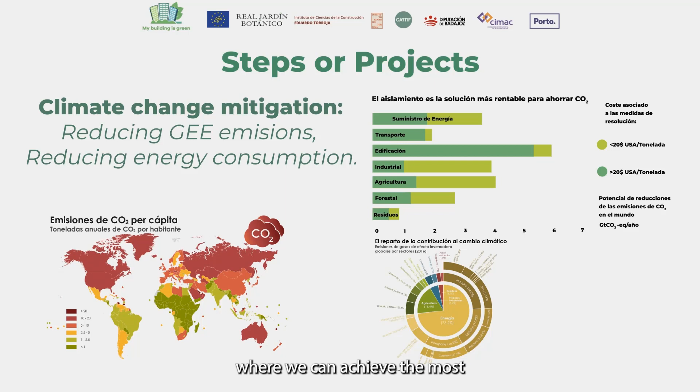What can we do about climate change? On the one hand, we must offset its effects, and on the other hand, we must adapt to the real change that already exists. How can we mitigate its effects? By reducing greenhouse gas emissions, by reducing energy consumption. Building in the Northern Hemisphere is one of the areas where we can achieve the most with the least investment.

Although we continue to work on mitigation, we must adapt to the reality of climate change, and we cannot do this by installing artificial cooling that increases greenhouse gas emissions, but through passive measures such as shading or ventilation, traditional measures of bioclimatic architecture, and in this case, through the use of nature-based solutions with the presence of biodiversity.

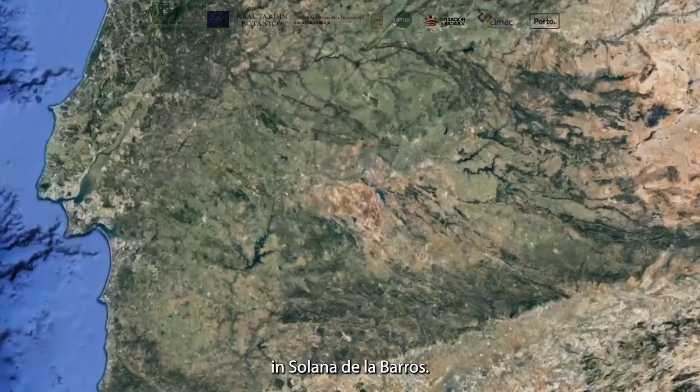In the case of the consequences of flooding, it is advisable to use sustainable drainage systems, reforestation, and the creation of protective infrastructures. In the specific case of the Gabriela Mistral School in Solana de los Barros, we have a building chosen for its ideal architectural configuration, ideal for testing and trying out the implementation of nature-based solutions.

We have a central building, the oldest of the existing ones, with a hipped roof and a new annex module built in 2006, with flat roofs at different levels, ideal for the incorporation of NBS, nature-based solutions. The facade we see has an east-southeastern aspect so that it receives a lot of sunshine throughout the school day.

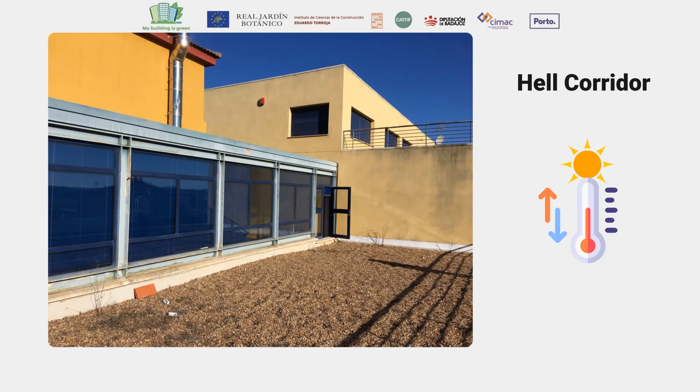Here we see how the two buildings are interconnected. A glazed corridor without any kind of solar protection, which the school has dubbed the Corridor of Hell, due to the high temperatures reached inside because of the greenhouse effect.

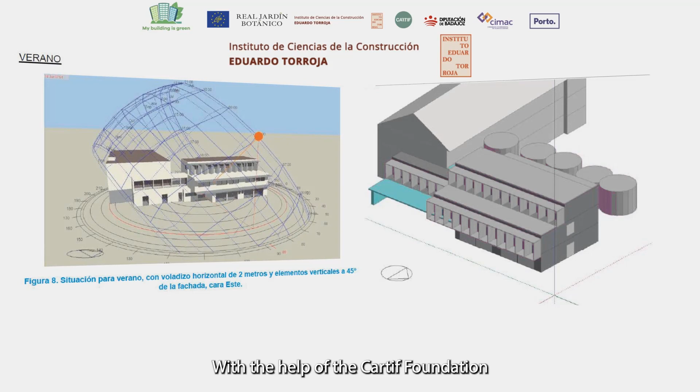For all these reasons, the building could be fitted with various passive measures. With the help of the Cartif Foundation and the Eduardo Torroja Institute of Construction Sciences, a sunlight analysis of the school was carried out, and depending on its orientation and volumetry, it was possible to study how to incorporate these shading elements as an effective main measure to reduce the high temperatures.

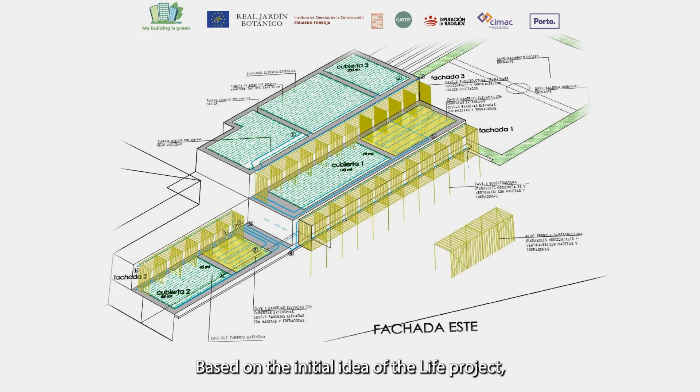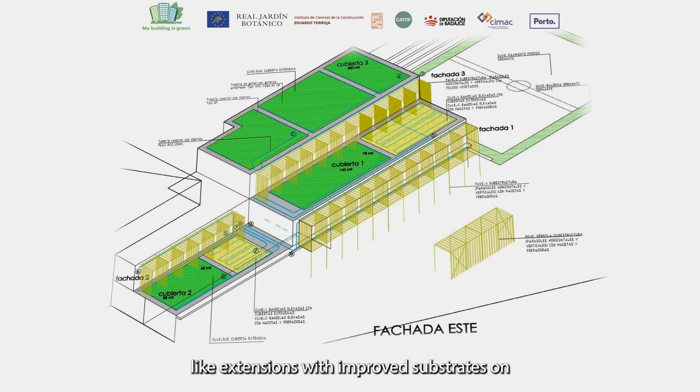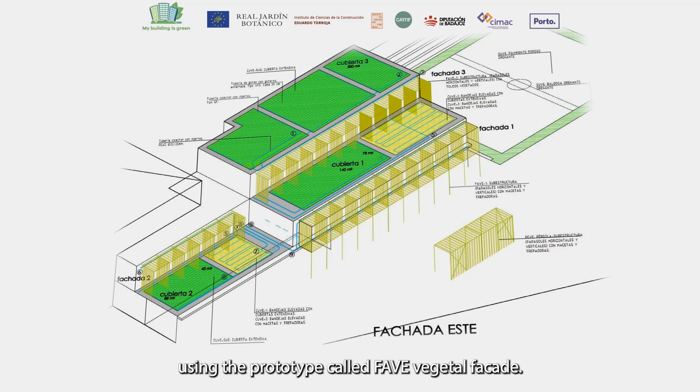Based on the initial idea of the LIFE project, the following prototypes were designed in the annex building based on traditional passive measures that incorporated innovative solutions, acting on the envelope and on the exterior spaces. The inclusion of vegetal roof covers of various types, like extensive with improved substrates, or on trays designed to generate cold frames. Shading of facades pointing to the east, southeast using natural solutions, using the prototype called FAVE, vegetal facade.

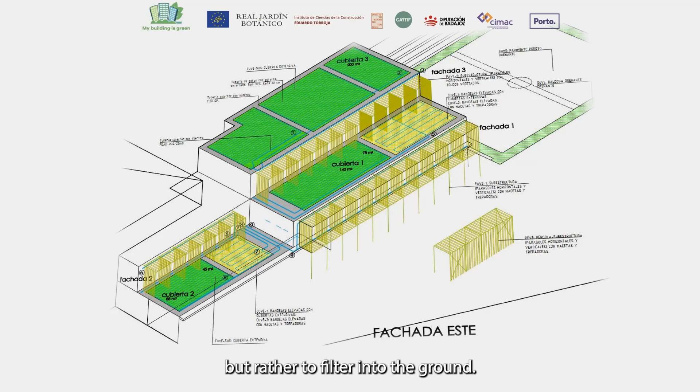Outside use of shades by means of vegetal pergolas, PEVE prototype, and the creation of vegetal drainage soils, so that rainwater flows avoid flowing into the municipal stormwater systems, but rather filter into the ground. This is about the SUVE prototype.

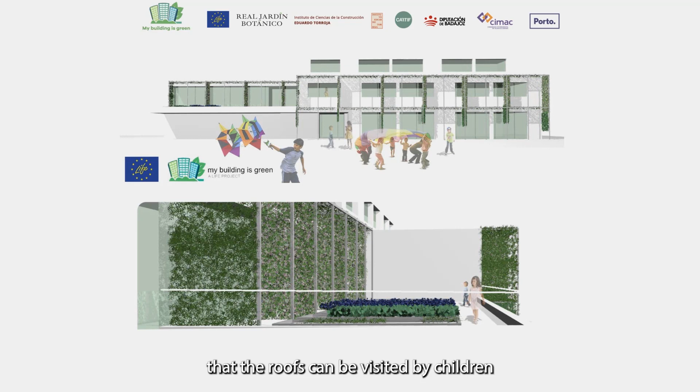The aesthetic result of the various implementations could be very attractive by modifying the appearance of the facade. The building also has the oddity that the roofs can be visited by children, so they can be used as an educational resource to show different options based on nature as solutions to climate change.

The FAVE prototype is designed as a substructure, backed by the facade that serves as a support for the planting of deciduous plant species, allowing sunlight in winter and generating shade in summer.

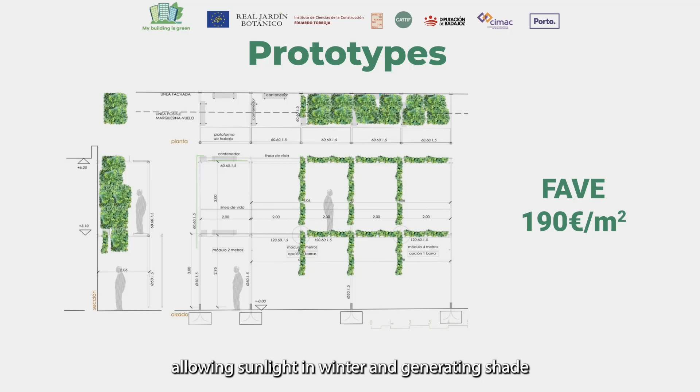The FAVE system on the date of the work carried out cost approximately €190 per square metre, including the structure, pots, plant species and a proportion of the irrigation system.

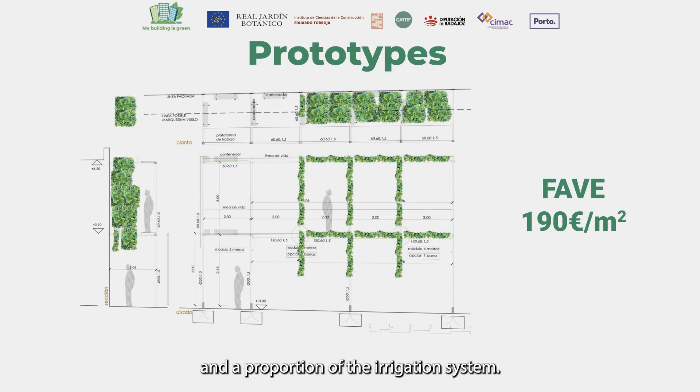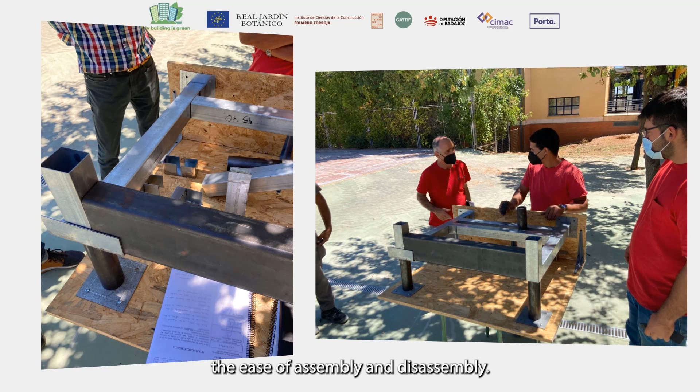Conceived as a modular, demountable system with the possibility of being replicated in other buildings, small-scale prototypes were made before the work was carried out to study the ease of assembly and disassembly.

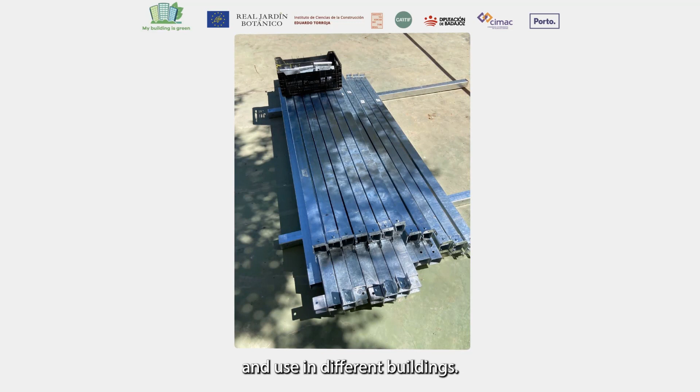A three-dimensional structure of bars of standardized sizes with bolted joints was conceived, facilitating manufacture and use in different buildings. The deciduous plant species chosen for the facades were the Tricuspidata and Quinquefolia varieties of virgin vines.

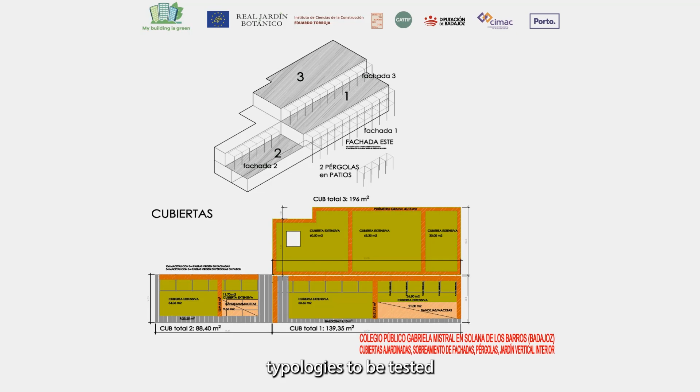In the case of roofs, the project established different typologies to be tested on the different roofs of the building. Extensive roofs, using recycled aggregates as part of the substrate, or rock wool, were combined with roofs resolved with elevated trays to generate cold roofs. The necessary maintenance paths were also provided.

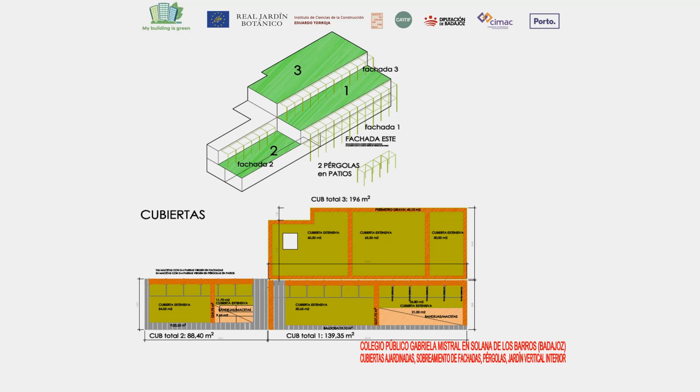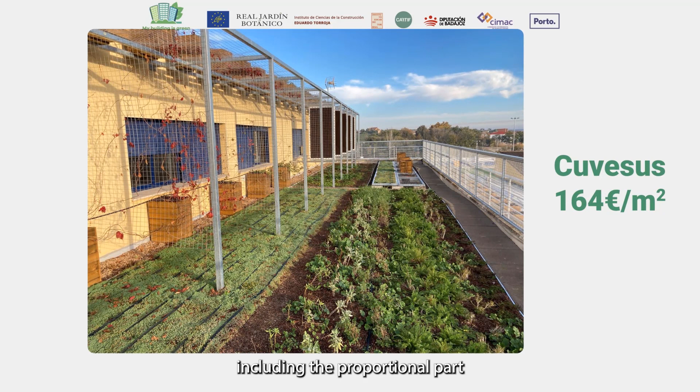The average cost of the green roof prototypes was approximately €164 per square metre on site, including the proportional part of the common irrigation installation provided for all prototypes.

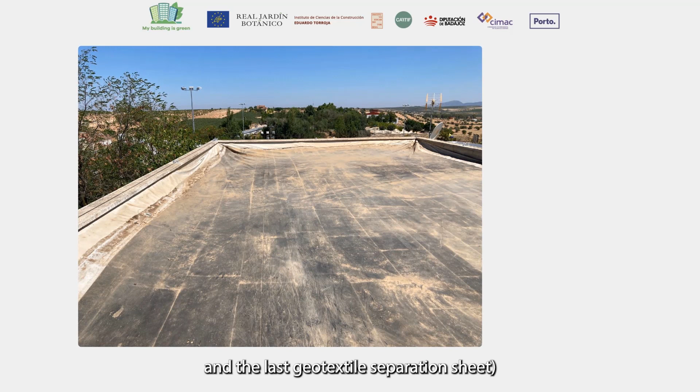The renovation consisted of removing the entire package of the existing inverted roof: gravel, geotextile sheet, thermal insulation and the last geotextile separation sheet, exposing the waterproofing. Although the condition of the waterproofing was correct, due to the time elapsed since its installation, it was recommended that it be removed and a new waterproofing system installed.

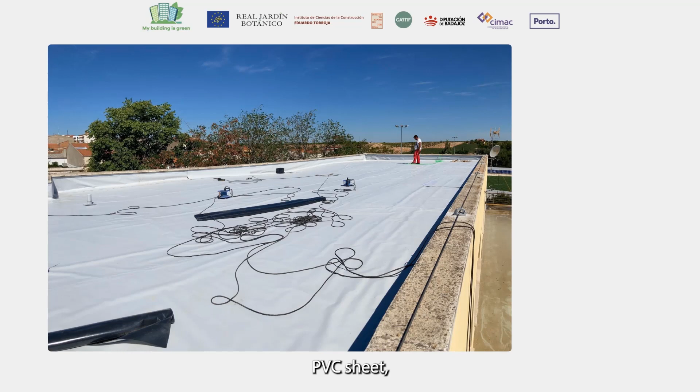A new installation began with a synthetic PVC sheet, which is always preferable to asphalt sheets, as the latter contain components of organic origin to which plant species are attracted.

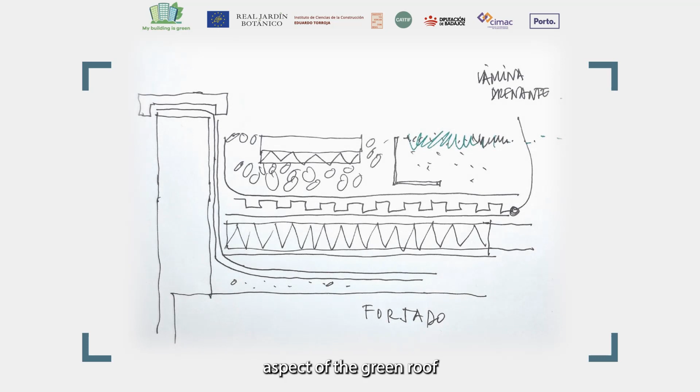Perhaps the most important aspect of the green roof construction solution is the incorporation of a drainage sheet compared to the traditional inverted roof, as well as the provision of anti-root and separating sheets.

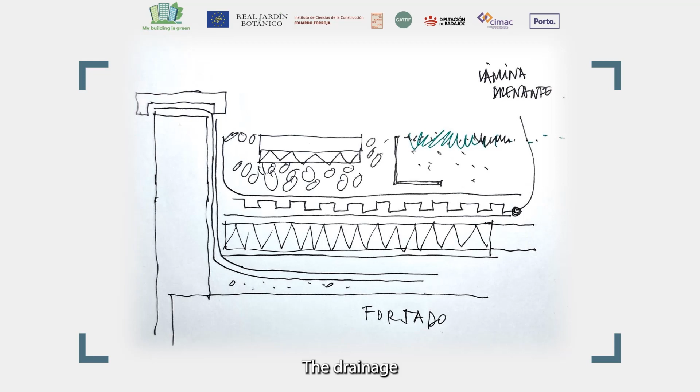The drainage sheet must be a specific product for these solutions, with sufficient drainage capacity to guarantee the functioning of the roofs.

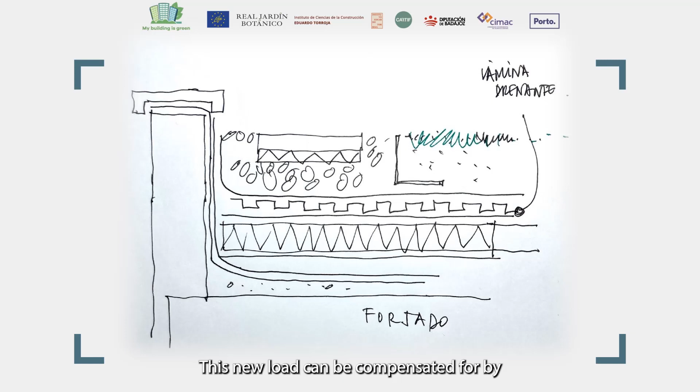The substrate should be at least 10 to 12 centimeters thick, so the plant species can have sufficient depth for their roots. This new load can be compensated for by removing the protective gravel layer that was removed, although each case will require a relevant load study.

If the structure is prepared, greater thicknesses can be used, which would allow other species to grow.

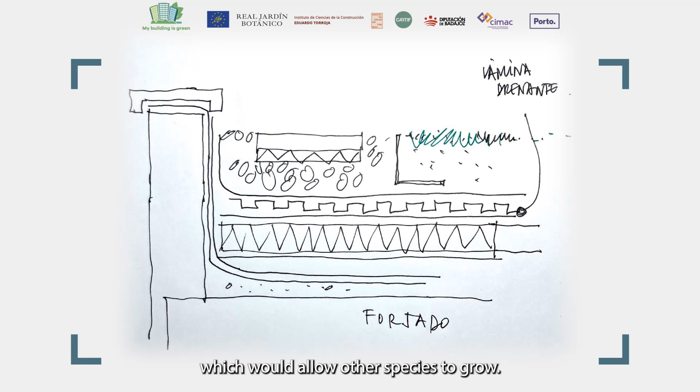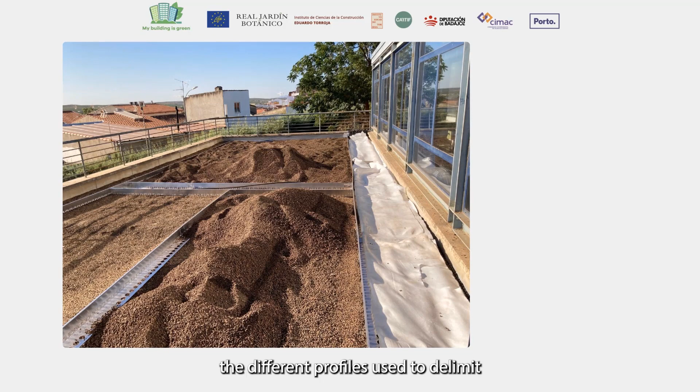In this image taken during the construction work, the different profiles used to delimit the different types of roofs and traffic transit areas can be seen.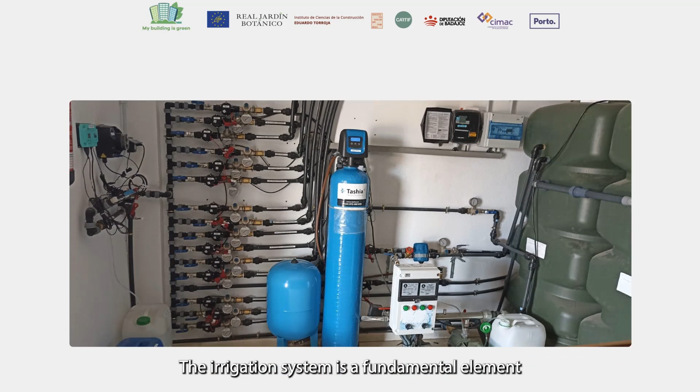The irrigation system is a fundamental element in the whole set of nature-based solutions, especially in the climate in which we find ourselves. Although plants with low water demand have been chosen to guarantee growth, especially in the early years, an adequate water supply is required that does not depend exclusively on rainfall.

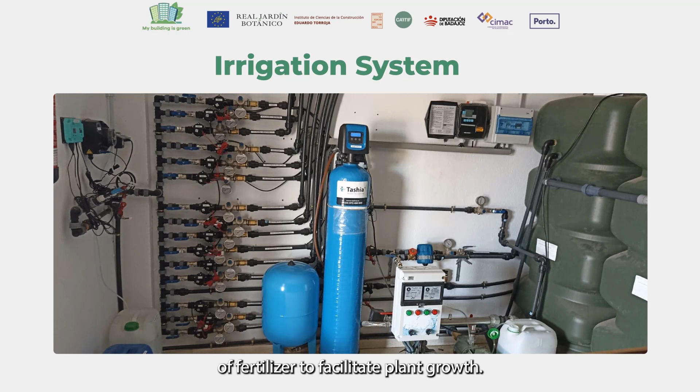The system is programmable and allows the incorporation of fertilizer to facilitate plant growth. The installation also has a system for collecting and storing rainwater and excess irrigation water for reuse.

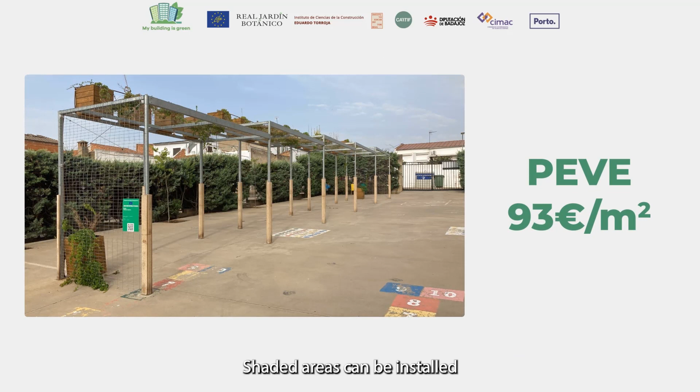Shaded areas can be installed in outdoor areas using the same deciduous plant species. The cost of these systems is around €93 per square metre.

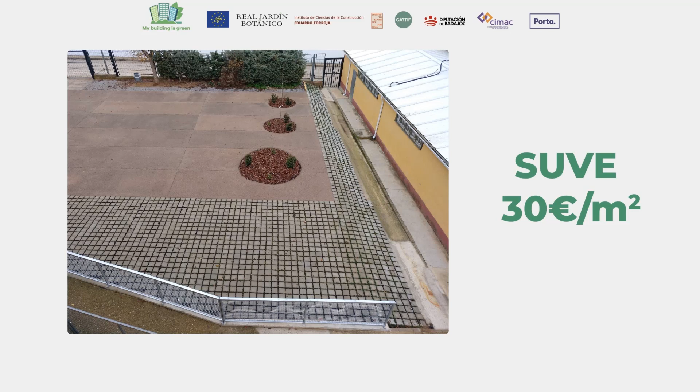As a prototype of draining soil, there were areas of continuous paving with porous concrete and areas with paving made of filtering paving stones.

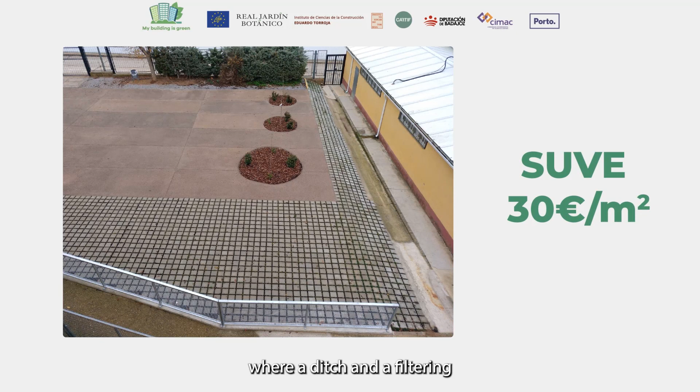In both cases, rainwater is filtered into the ground, where a ditch and a filtering well were installed. All of this avoids the discharge of rainwater into the sewage system, avoiding unnecessary treatment and corresponding energy consumption. The approximate cost of these systems per square metre is around €30.

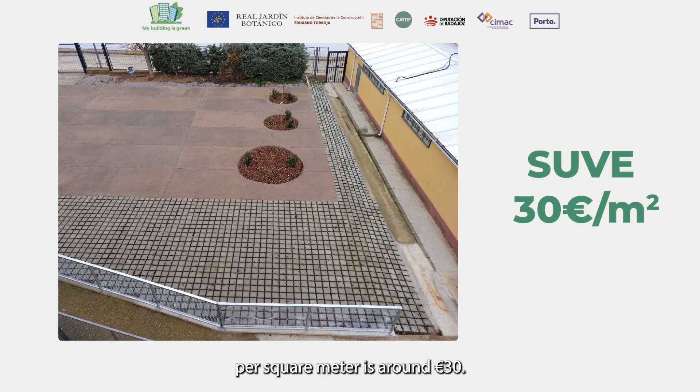A prototype vertical garden was installed inside the building, which seeks to cool the environment thanks to the evapotranspiration of the plants. These installations also absorb CO2 from the environment and are a great visual attraction. The presence of nature as wall cladding inside buildings is recognized as having positive psychological benefits for occupants.

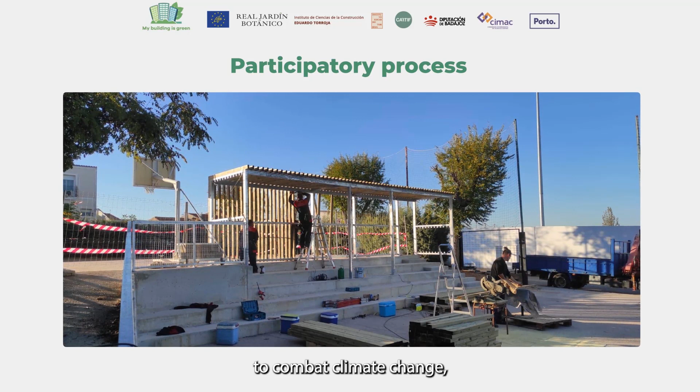Once the installations were completed, a participatory process sought to define other solutions to combat climate change, and the educational community decided to gamble on more shaded areas. A pergola was built with natural wood slats of copper-treated pine superimposed on a metal structure.

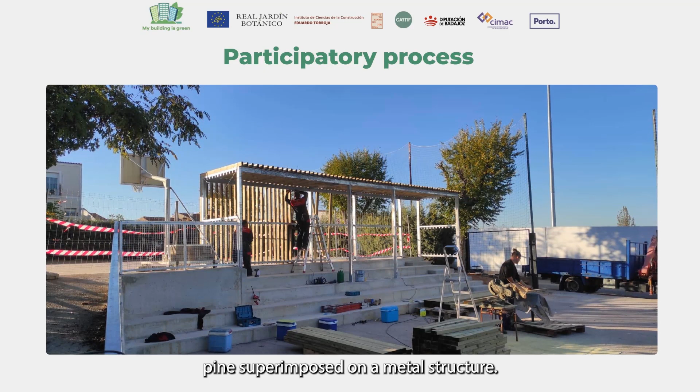In the first year of monitoring the building, we observed a decrease in temperatures inside the areas of intervention of between 8 and 11% compared to the original temperatures.

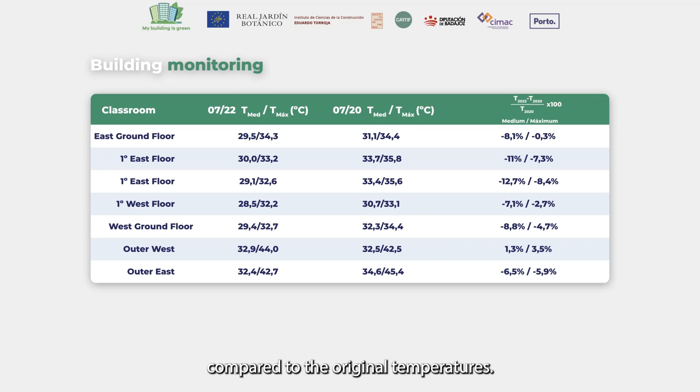The thermographic images show, for example, the temperature differences between conventional roofs with a pea gravel finish, where temperatures reach up to 48 degrees Celsius, and the new green roofs, where surface temperatures drop down to 29 degrees Celsius.

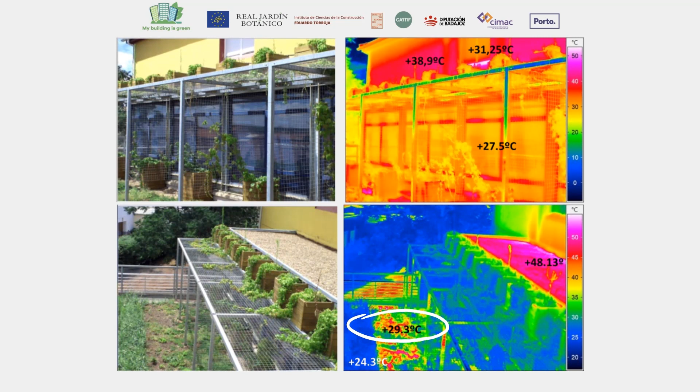With the investments made, it only remains to analyse to what extent these solutions are more or less suitable for adapting buildings to climate change, compared to other measures such as the installation of artificial cooling features, also taking into account the psychological and educational benefits of the nature-based solutions used.